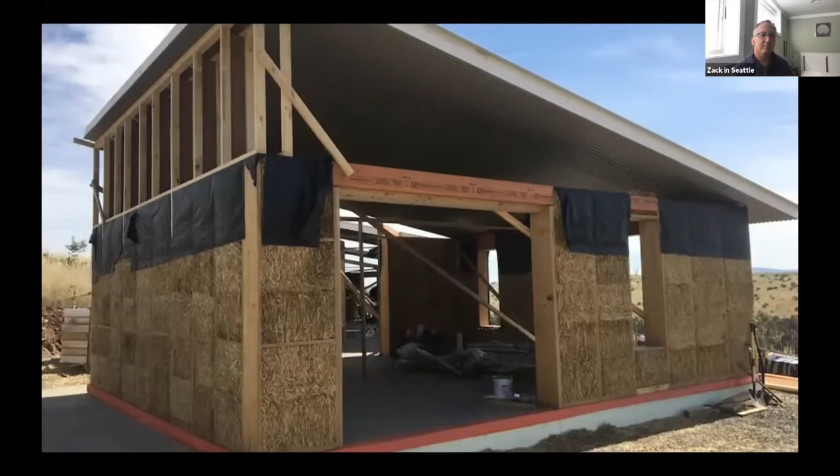Noonamina sits on 20 acres in central Victoria, which experiences significant temperature ranges from 0 to 46, which we experienced this year. Humidity can range from 20% to 100%, and the performance of the house is just wonderful when these extremes are experienced outside. The house is constructed from a straw bale tilt-up panel system, providing R values of around R9 to R10 in the Australian system, and is rendered with a fly ash and lime-based render with an airtight layer on the inside face of the panels.

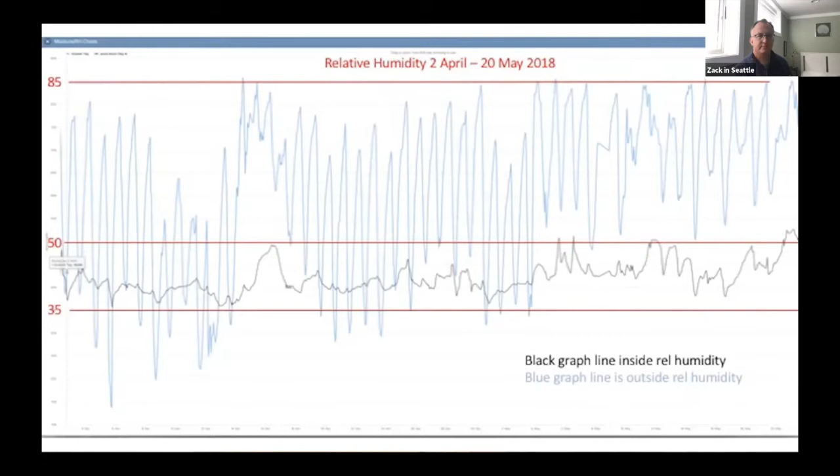The performance of the house provides stable temperatures between 19 and 26 degrees more than 95% of the time without any additional heating or cooling. Humidity of the home is a stable 35 to 50% relative humidity, which provides a very comfortable environment to live.

With all passive houses, the need for a heat recovery ventilation system is essential. To provide this comfortable and stable environment, we've had to maintain our air tightness at a high level. We have 2 dogs and have installed a dog door that provides airtight sealing and easy access for the pets.

Noonamina is all electric. Our kitchen has an induction cooktop and a recirculating charcoal filtered range hood. The heat recovery ventilation system is a Zehnder Q350, providing exhaust and fresh air supply throughout the home.

Hot water is provided by a Sanden heat pump system. Thermal comfort is enhanced by ceiling fans in every room, and when required we have a separate split system air conditioning system, and we spoiled ourselves with a bionic wood fire which has been used very rarely in the last 3 years. We have installed 7.7 kilowatts of solar panels onto the home.

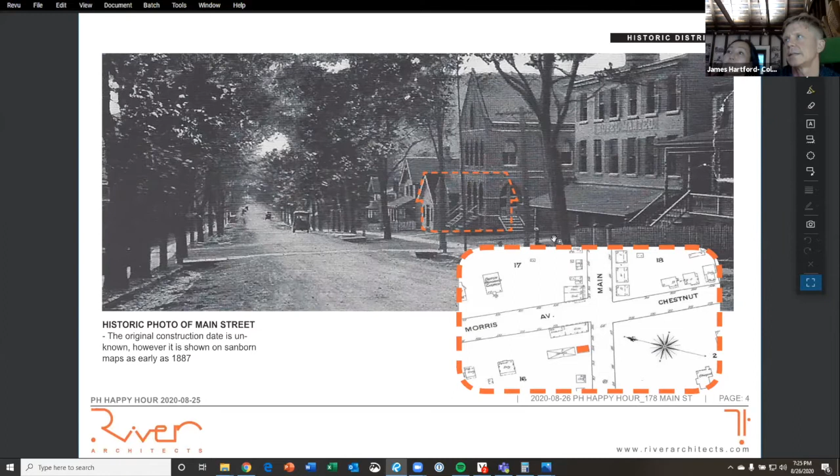So the strategy that we had was to kind of classically follow the lines around, making the exterior sheathing layer of the existing building the air tightness layer, over-insulating for that. And then in the basement, we'd flip that. The original goal was to retain the original stone walls and then insulate to the inside.

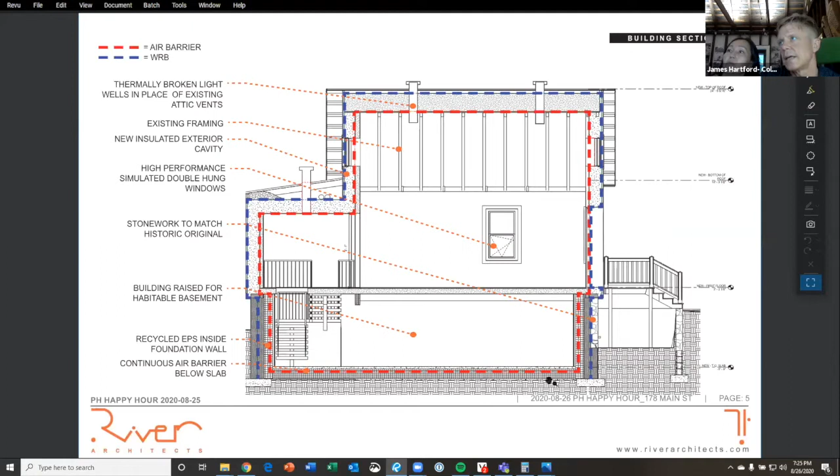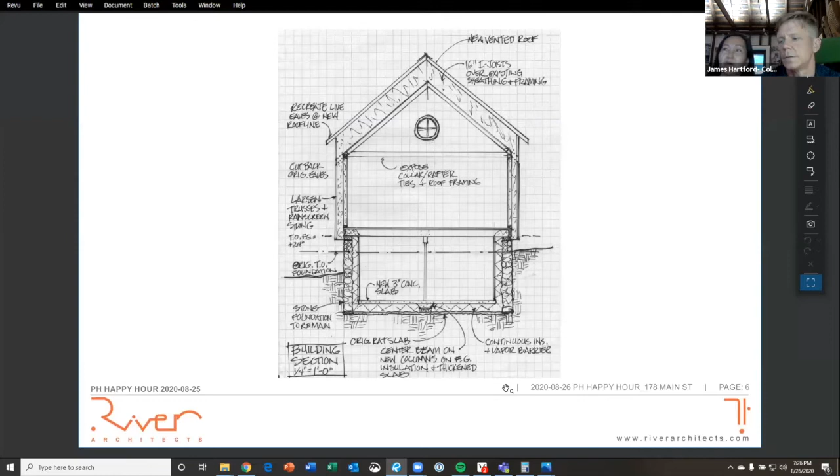And in the back of my mind, I'm always wondering, how is that new and old stone wall going to look, one against another?

And so here you see the original framing. We chose to expose it for the roof, and the skip sheathing from the old wood cedar shingles that were on it. Miraculously, this horseshoe shop did not burn down - it just had a big open hearth in the center and a forge, and then had 2 roof vents, which we actually replaced with light tubes.

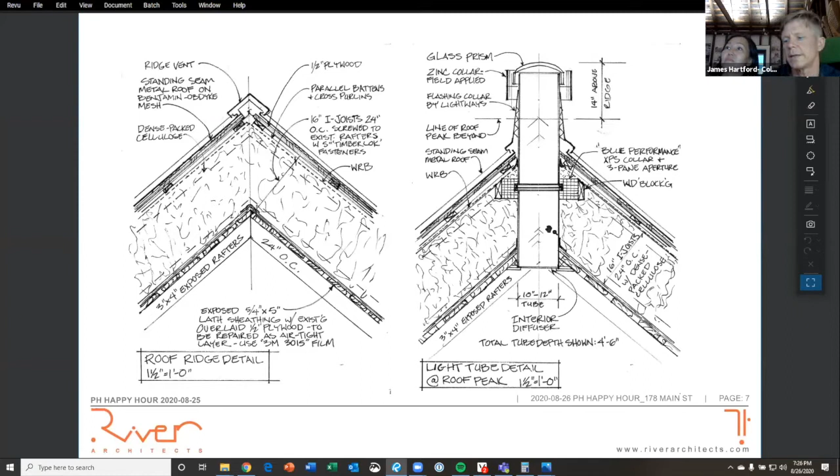And so the original sketch is here - trimming off the rafter tails and putting new wall sheathing here, then wrapping the whole thing with an air tightness layer, then recreating to the outside those rafter tails and just kind of giving it a puffed up look.

And we came up with a pretty good - this is a window section in the basement plan detail - where we introduced foam glass around the perimeter like that, so that we were able to get over insulation on the frame, and then just did a little stucco wash there to make it blend into the stonework.

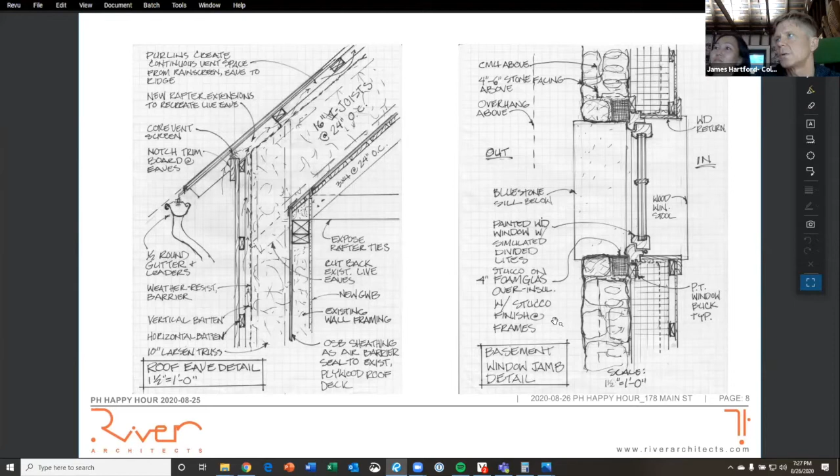And so here it is, extending up the stonework, nice and easy. Same idea with the foam glass wrapping all the way around.

But then we realized the stone foundations had to go. So we stuck with the same plan, but moved the framing out, because the goal was to support the original structure. We moved the plane of the masonry out, bringing the stonework out so it reduced the amount of overhang there.

And we created a shelf in the masonry to reclad with reclaimed stone from the original foundation, which is the glacial till, throughout the Hudson Valley here.

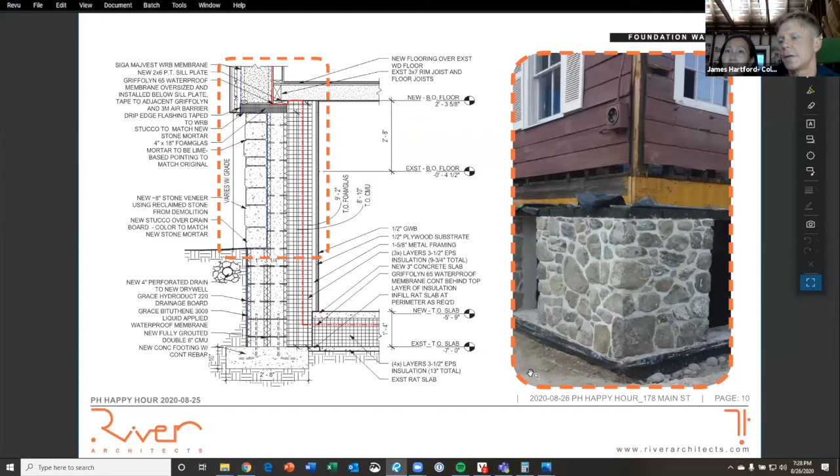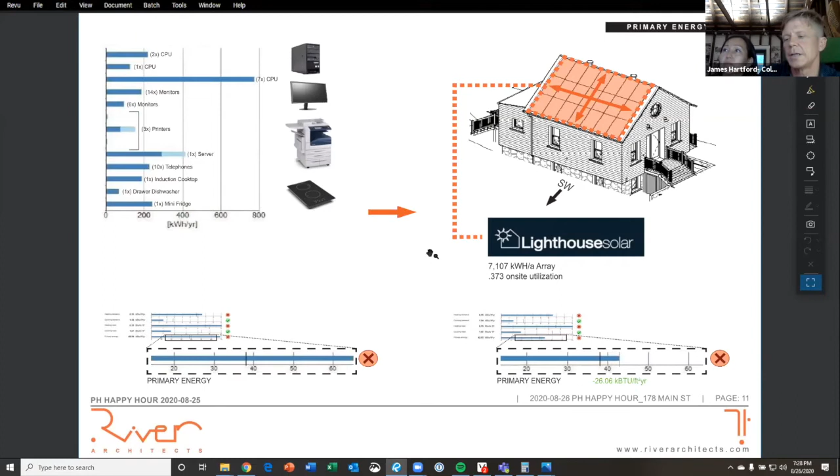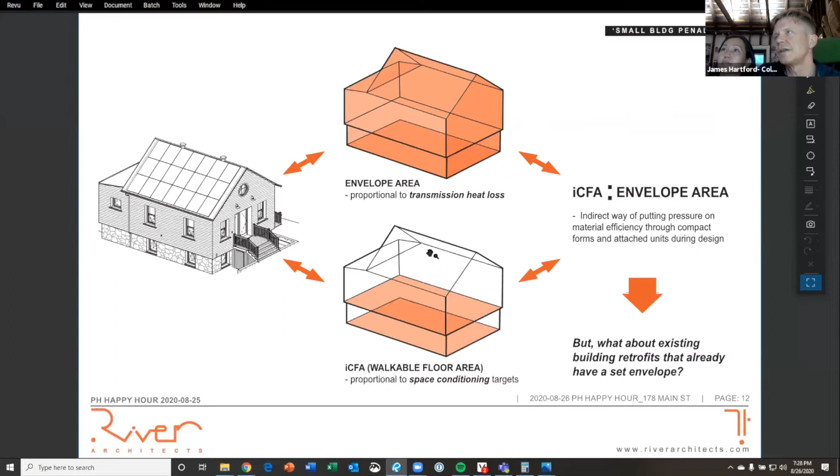And it has a lot to do with the small building penalty, which if we added just 300 square feet of loft space, we would have actually hit passing.

So I'm going to just kind of cruise past these.

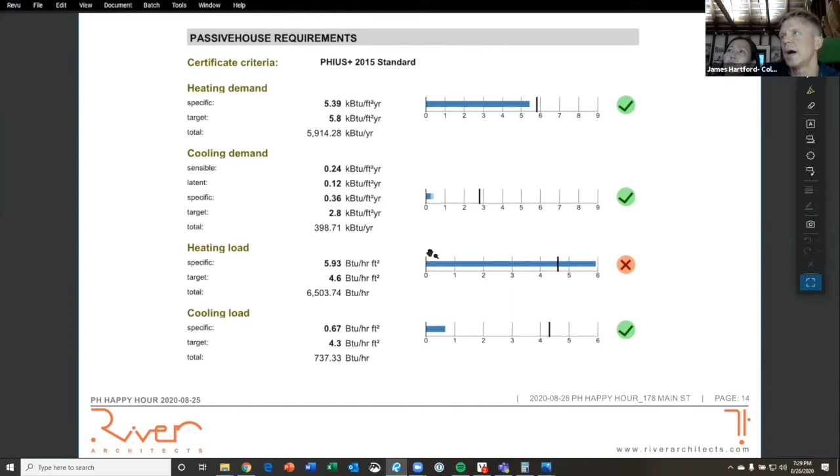We found that the heating loads and cooling loads are actually not very accurate as modeled. We have no problem heating the building. We do require more cooling than the model suggests.

And if we were to shift the building, you can see here, if we just added a little bit of square footage, we would be passing. This is a study of various projects we've done, floor area ratios.

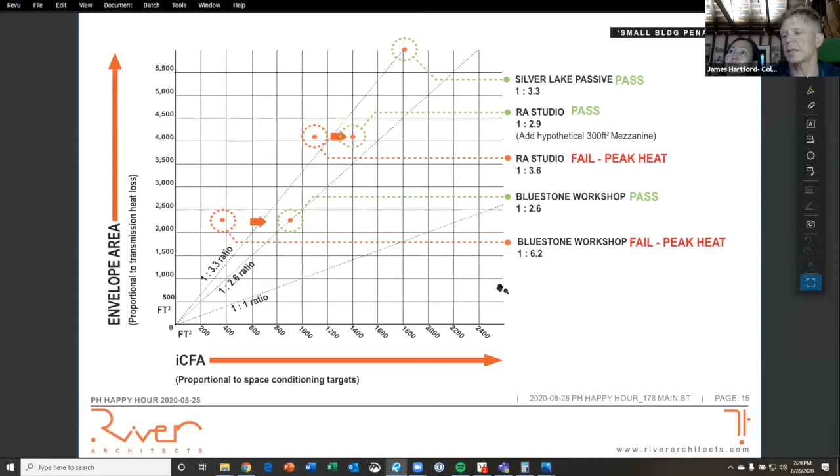And then back to the energy modeling, once we added a preconditioning loop in the ComfoFond for the Zehnder, we actually brought it into passing.

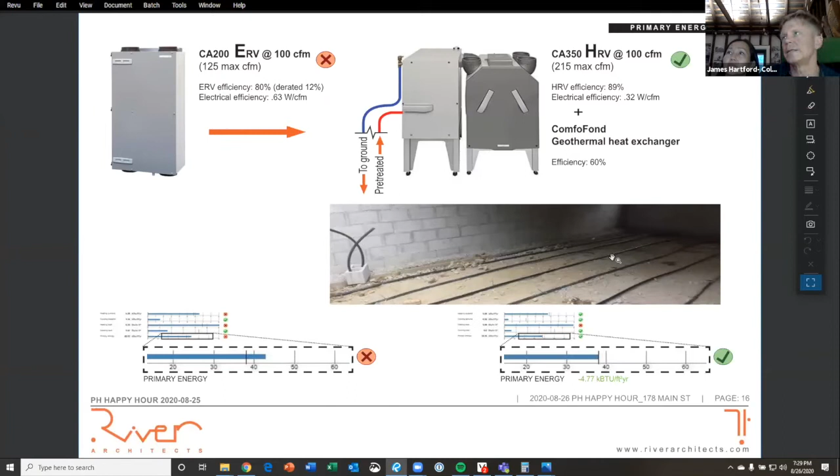So we just basically have ground temperature water in contact with the soil under the insulation of the basement floor, and that gives us all the tempering we need to make our primary energy pass.

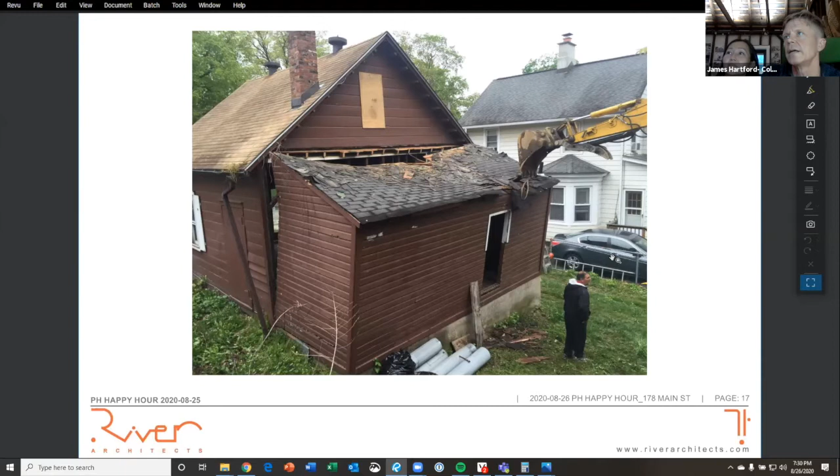And so then the work begins. Here we are tearing off this little shed addition off the back, which we end up recreating to create the stairwell. As we did that demo, we realized the rubble foundation was just really bad to begin with.

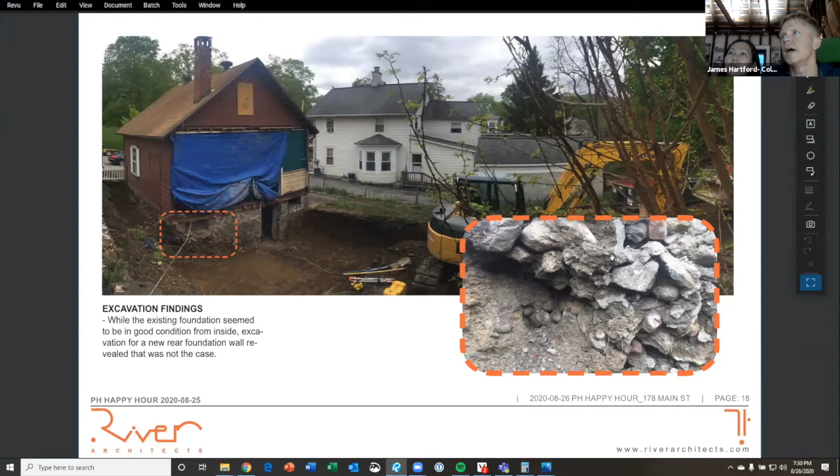Just really eroded, there's no mortar left. And as we dug further, we discovered gasoline from the gas station. So we had subsoil contamination.

So we braced the building. Originally we had a moving company lift the building. Since it was already up in the air, we decided to have them basically skid it into the backyard there.

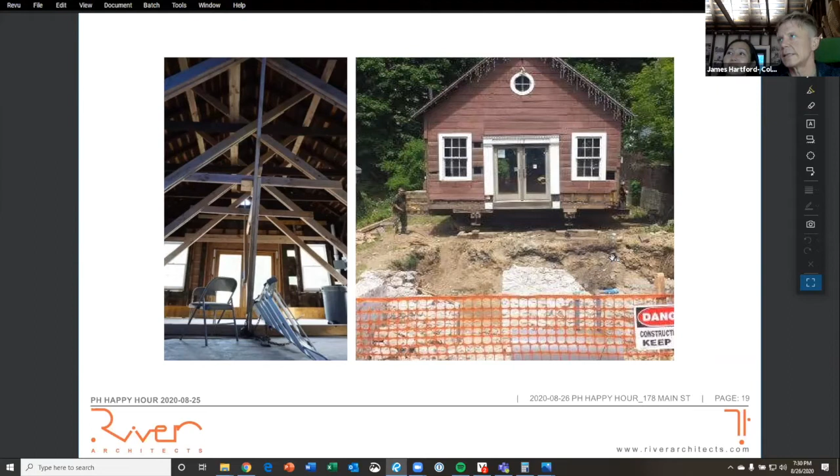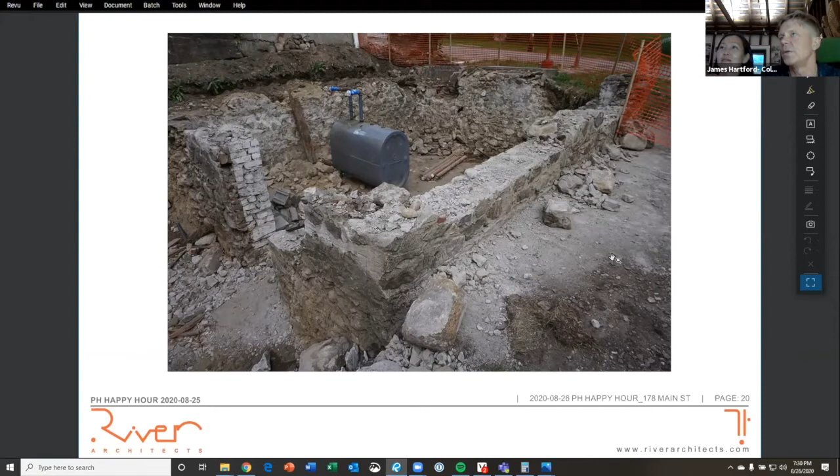And there's our fantastic foundation. And we had that tank, we removed that. But once we removed all this rubble, we were able to gain back quite a lot of space actually on the interior.

And taking a pause, we were saying the bright side of the thing is the good thing that we were doing - we were already committed to extensive renovation. I said, can you imagine, we were just laymen and just bought into the office and renovated the heck out of the interior and moved in - what would have happened if we discovered this afterwards and had to move out again. We were saying, thank God we found out before.

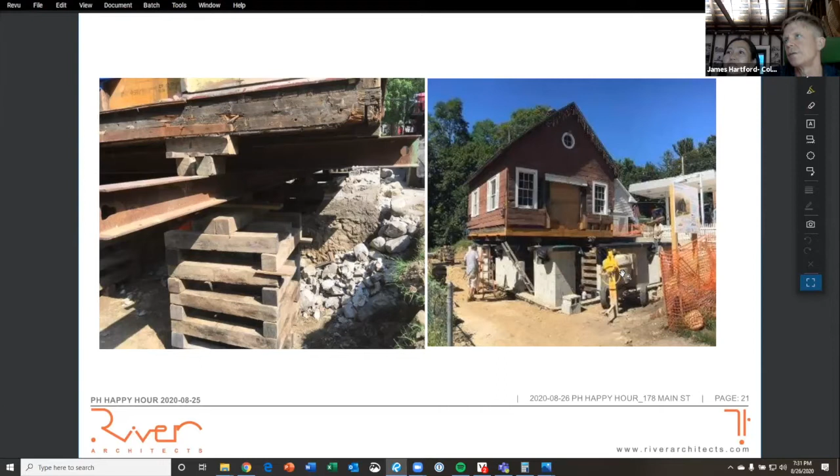So here we are with the foundations now recreated and the building being skidded back in. You can see our foam glass and then our vapor barrier kind of flopped over.

But the simple plan of just setting the building back down is made much more complex by this system of steel I-beams that we need to pull out, the needle beams. So we had to kind of repair things, but we did pretty well.

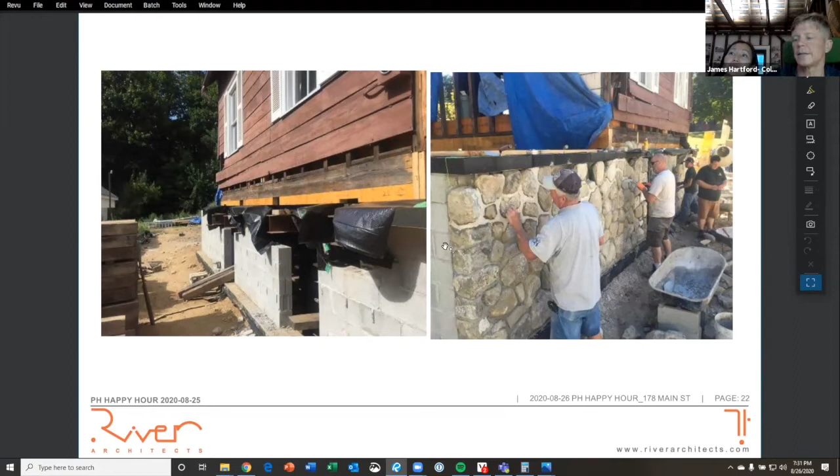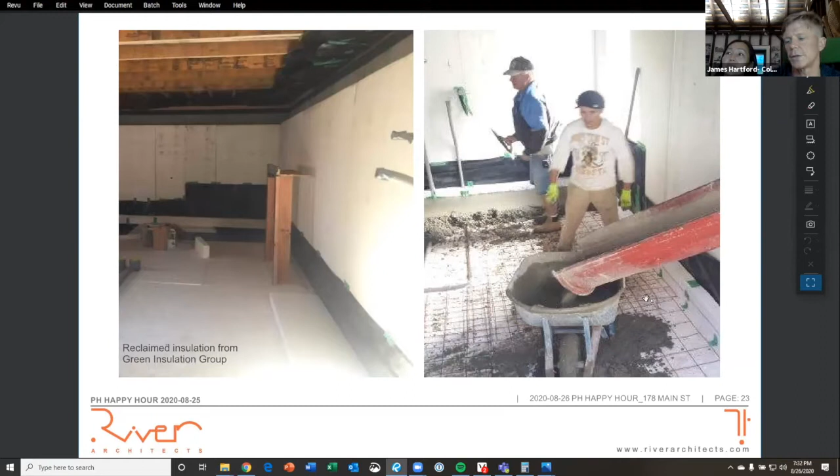So we used reclaimed EPS foam insulation for the basement, and we used the final layer of that buildup to the inside of the vapor barrier to protect the vapor barrier from all the work and the sharp edges of the welded wire.

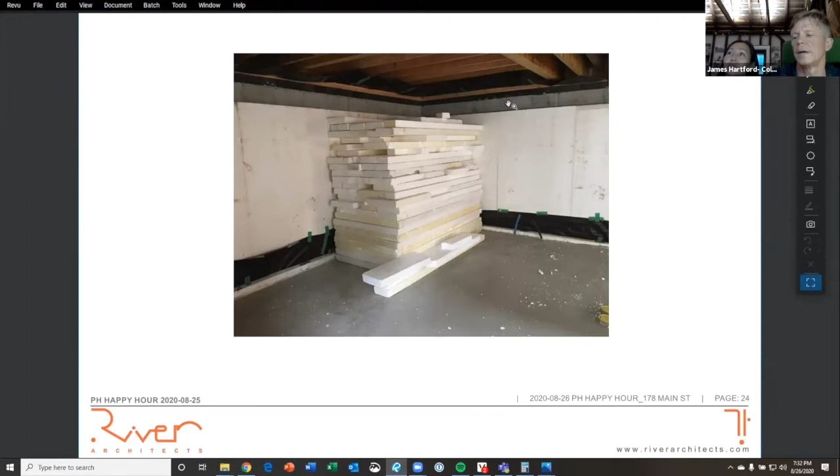And so that's some leftovers from it, but you can see our vapor barrier just waiting to be extended up and then sealed to what's flopped up there above the foam glass. So you can see the foam glass marching all the way around there - and that's our source for Green Insulation. We can come back to that.

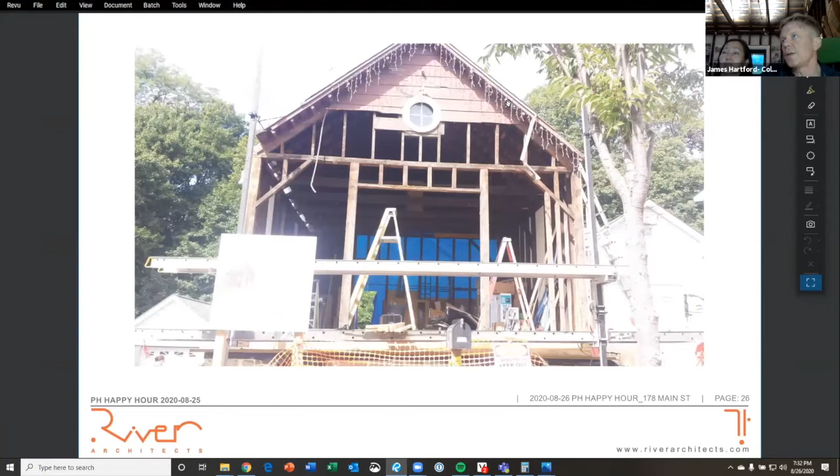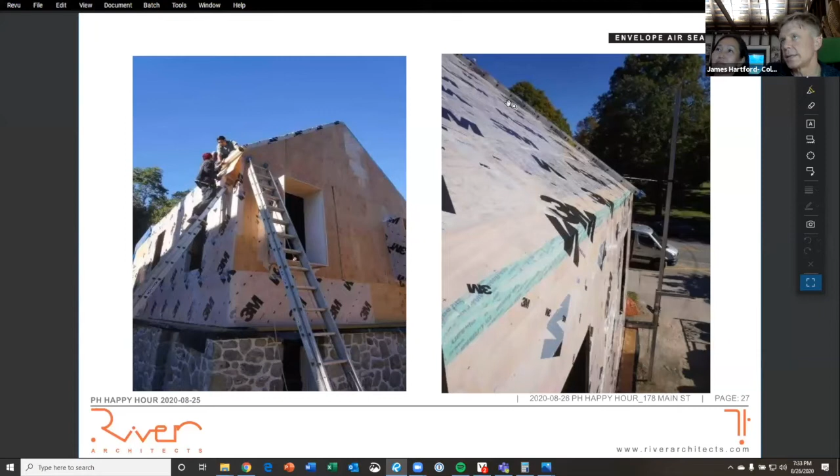And so at the end, we basically came back with a timber frame that we reclad, and reskinned the walls. We used the same plywood that was overlaid on top of the original skip sheathing, and then wrapped it with this 3M peel and stick film, which was really great.

Friends have said that we should have built a couple of bleachers across the street so that the neighbors can sit there and watch us, because it was so entertaining for the neighbors.

So then we built up, you know, we have 14-inch Larson trusses on the walls. We made a decision to expose the timber frame on the inside. So what was originally 10-inch Larson trusses, we then boosted up to 14 inches so that we can get all that extra R value outside and meet our energy model. We have 16-inch Larson trusses across the roof. And then you can see here where we've recreated in hemlock, which is the original species, the rafter extensions.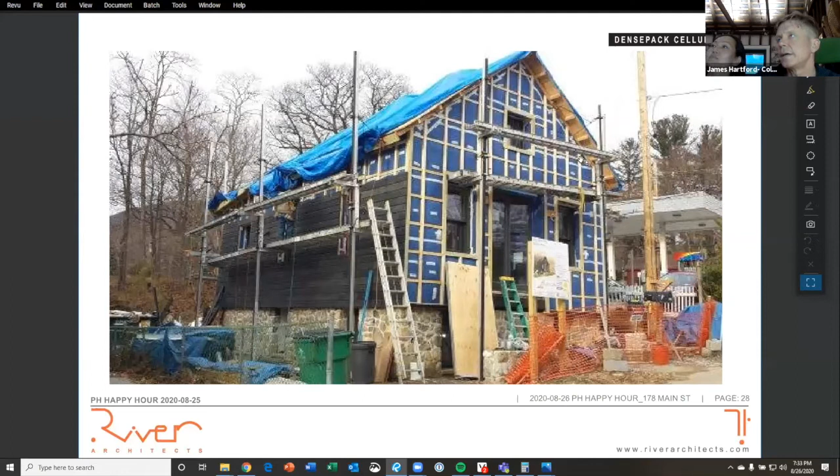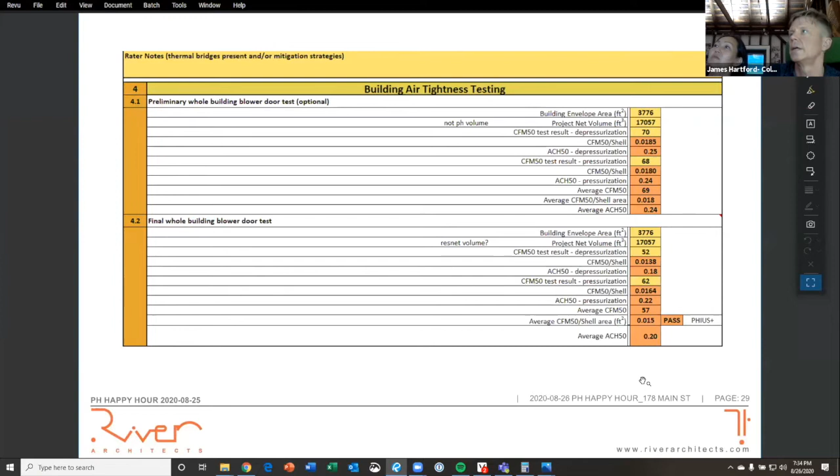And so this is our air test, our air tightness testing results. We did actually phenomenally well. So 0.24, actually in the final average ACH 50 at 0.2. So we far exceeded what we were supposed to hit. CFM 50 for the shell, 0.0138. So really, a very, very tight building. It's about the equivalent of half of a credit card in surface area.

And so, people are like, you're crazy for all that you've done. But when we sat back and looked at the space that we've created for ourselves, we realized we weren't so crazy. It might have been a labor of love, but we have marmoleum floors, true linoleum floors upstairs.

The guys who were installing it, it was a bitter cold day, and gave Juhee very strict instructions. Before he came, he said, I need real heat, I need my material to acclimate to the temperature. And he came and I gave him a tiny little space heater to plug in. Those little quartz ones this big. And he was so mad. He said, I told you I need real heat. And then about noon, he had to unplug and open the doors. He was all sweaty, and he said, I've never seen anything like this.

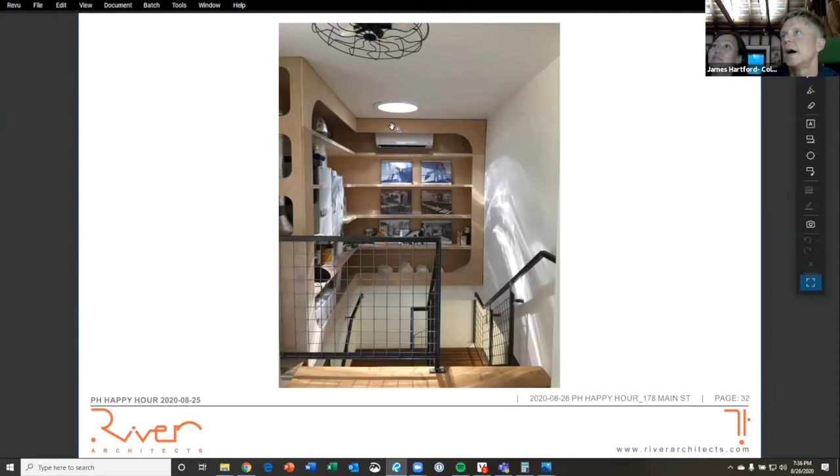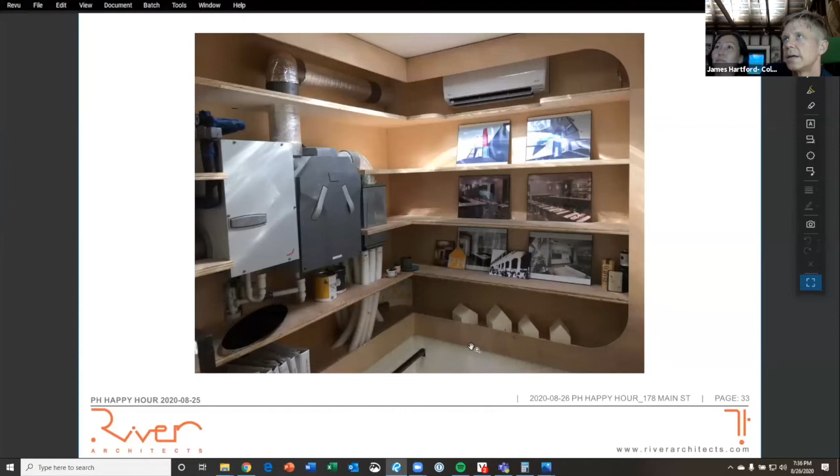So here's a solar tube, and the amount of light that it throws down is just incredible. This is our system on display: a tiny little 9,000 Btu heat pump, our ComfoFond here, and our Zehnder 350. We use the larger Zehnder—we could have gone smaller, but ComfoFond is only adaptable to the 350 or the 550—and that's only one unit that we use for both floors.

So just to give an idea of what's out there, there are some decent federal and state incentives. We were able to pursue a couple of them. The solar panel incentives was the easy one, and we also pursued the SBA loan for MWBE businesses.

The paperwork for that was so overwhelming that we couldn't pursue any other incentives. After the fact, we learned there's actually a technical preservation services incentive, a tax incentive for restoring historic buildings, but we didn't get to capture that. We were running blind.